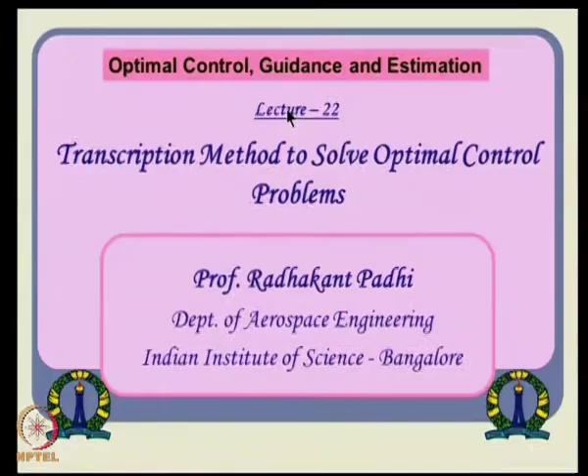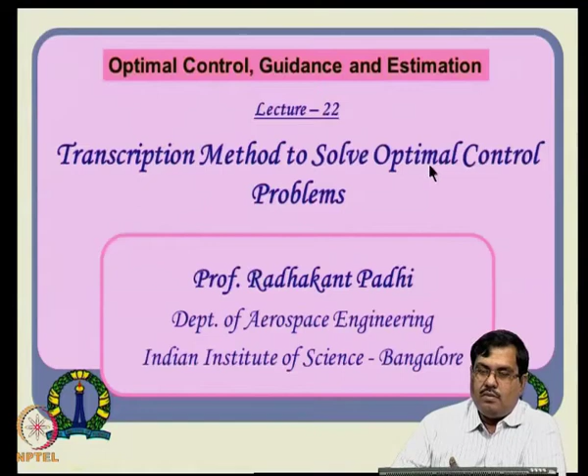Hello everybody, we will continue with lecture number 22, where we will talk about this different idea of solving optimal control problems, known as the transcription method, followed by its generic philosophy - we will not cover too much detail there. Then we will go to a recently evolving concept called pseudospectral transcription. It borrows the idea from transcription method but puts the problem in a different framework, so the solution can be very fast, and hence the claim is it can be done in real time. That is a very recent thing. So we will see the concept first - what is transcription method - then slowly migrate to that, and follow up with some problem solutions.

The topics are like this: first you will see some motivation, then philosophy of the transcription method, which is very different from what I am talking about here, which is direct transcription. This direct transcription is slightly different from what you have seen before, followed by pseudospectral transcription. We will demonstrate the idea of pseudospectral using a toy problem first, and then go to a real application problem to see how this is useful. Remember, several problems have been solved by different authors recently using pseudospectral methods - we will not go too much into that, but I will list references for further reading.

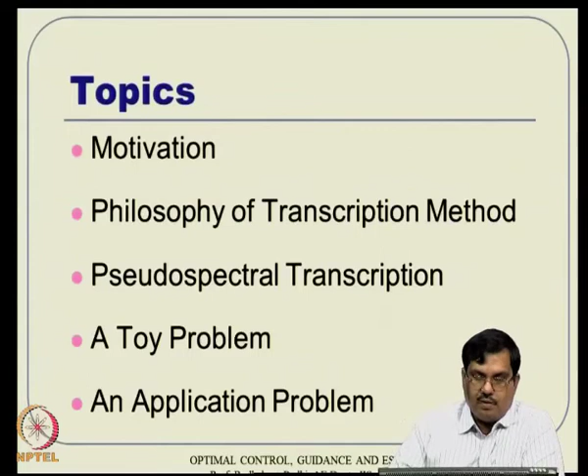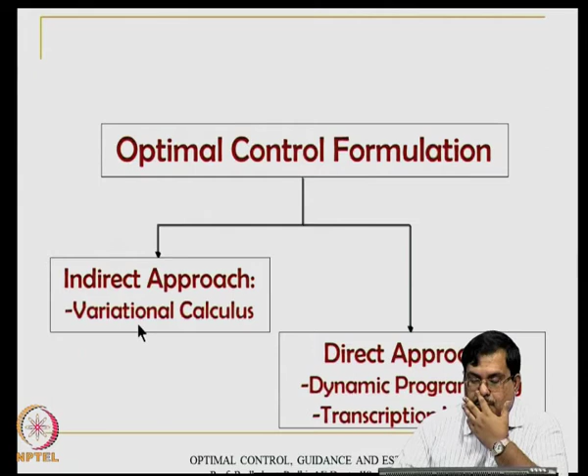Let us see the motivation first. In a generic, global view, optimal control formulation can be thought of as having two approaches: one is the indirect approach, one is the direct approach. In the indirect approach, we studied something like the variational calculus approach, which leads to a two-point boundary value problem. Whereas in the direct approach, we have dynamic programming, which we have already studied, and then we will have the transcription method, which we are going to study today.

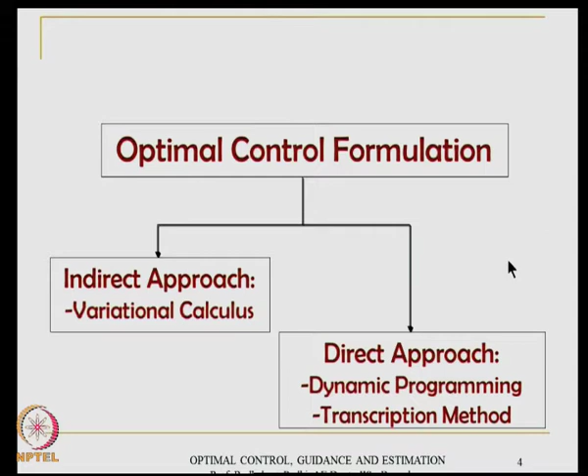So this necessary conditions of optimality through variational calculus - this is the idea that is developed. First, we have dualization of the problem: we have the state equation, but along with the state we now assume another co-state equation, another set of equations of the same dimension, like lambda dot. So we have the state equation, along with a co-state equation, and an optimal control equation, which is a stationary equation. If you solve it, we get the solution of control as a function of state and co-state.

Then there are associated boundary conditions: the initial condition is for the state, and the final boundary condition either is given for the state or comes through the transversality condition. Now, the question is - we have gone through these difficulties: the state equation develops forward, the co-state equation backward, it is a split boundary condition problem, hence it is a two-point boundary value problem, all sorts of things. Now, the shooting method is one more method.

Before, we talked about the gradient method and all that, but the shooting method is something like this: the whole idea is we have this initial condition of the co-state which is not known, so we guess the initial condition of the co-state. Now, once we have that initial guess, the state and co-state equations can be propagated forward together with respect to that guessed co-state value at T naught.

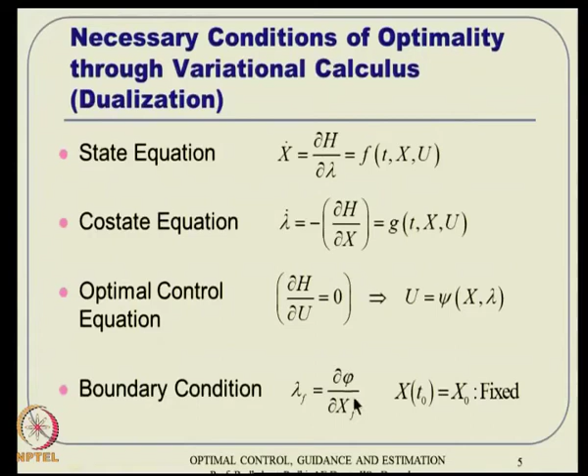Then we see - when t goes to Tf, your final value of lambda is somewhere here, whereas the boundary condition will give you something else, let's say that is here. So utilizing this error that has occurred, we update the initial condition from lambda naught 1 to lambda naught 2 and repeat the procedure. Maybe the next iteration it will go a little closer, and with further updates it will converge closer until it finally converges. That is the whole idea here.

So if you do that, the difficulty is that typically the co-state equation happens to be an unstable equation, and you are integrating it forward. So we have a sensitivity issue - it is sensitive to the procedure and essentially to the initial guess value of the co-state. The further difficulty is that we cannot have a good guess of the co-state, because co-states typically do not have physical meaning, even though there is a little bit of mathematical meaning.

That co-state is nothing but, if you already have the optimal cost, then in a dynamic programming sense, lambda is del J by del x, the gradient vector of the optimal cost. But that does not help too much in guessing a number for the initial condition of the co-state.

Typically it is done through a guessed control history, some heuristic or non-optimal stabilizing control. You use that control from the initial condition of the state to predict the state trajectory, and once you get a final state, you evaluate it and integrate the co-state equation backward, and hence get some information about lambda 0. Typically it is done that way.

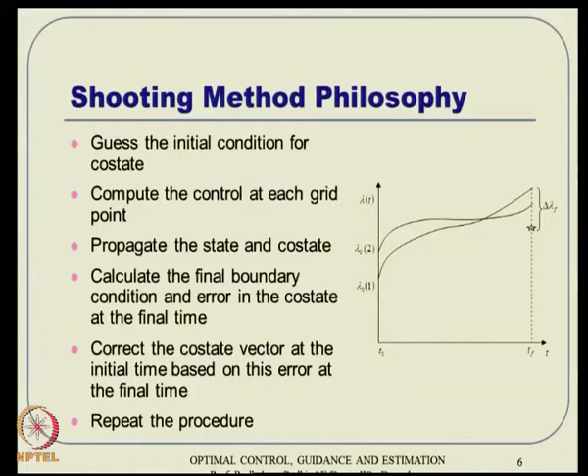The whole problem is that the co-state equation is normally unstable, and hence long duration prediction is not good. Anywhere there is an error, if you are not very close to the real optimal lambda 0, you will have this difficulty of error amplification very fast, because the dynamic equation is unstable.

So what do you do? We use this idea of divide and rule. Instead of predicting for a very long time, how about predicting for a shorter duration? Let's say T0 to Tf, I divide it into two parts, T0 to some intermediate Ti, and then Ti to Tf. This approach is called multiple shooting.

You split the duration into several segments like this, but when you do that, it brings additional constraints: around this joining point you have to make sure there's no discontinuity, the point should match, and derivative smoothness should also be there—at least the first order derivative should be equal on both sides. These are additional constraints at the joining points.

Having put these conditions in and solving it, this essentially leads to the concept of the transcription method, which is a direct approach. If you segment it into a large number of segments, it boils down to some sort of discretized version of the problem. Hence that is the approach called the direct transcription method.

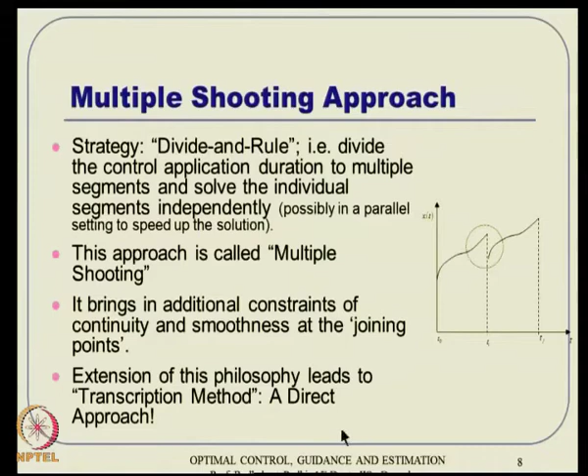So this is the philosophy of direct transcription. Essentially, it converts the dynamic system variables into a finite set of static variables or parameters, and then poses an equivalent static optimization problem. Then you solve that static optimization problem using static optimization methods—there are methods for so-called nonlinear optimization or nonlinear programming basically.

Then obviously you have to assess the accuracy and repeat the steps if necessary, with concepts like fine-tuning the grid points. If the coarse grid is not good, you go for finer grid points, and that is called mesh refining. So this is the whole idea of the transcription method.

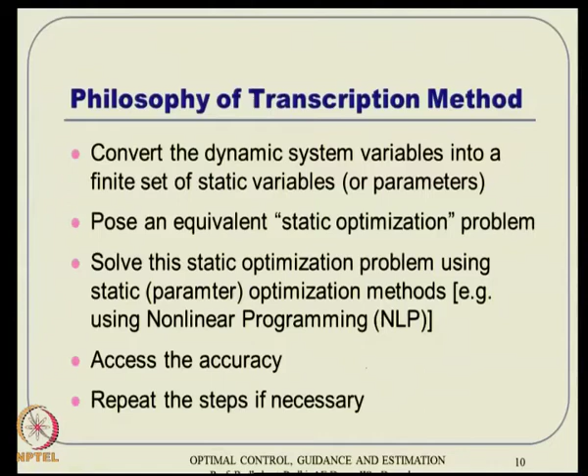Now, in a mathematical sense, what is the thing? We have the objective of minimizing a cost function—notations are slightly different here, but it conveys the same message. You minimize a cost function which is a function of state and control, an endpoint condition and a path condition, subject to the dynamic equation. For endpoints, there are soft conditions and hard conditions—some endpoint conditions equal to zero, functions of endpoints telling that the desired value can be fixed, or the initial condition can be known. All of this falls within this functional form if you write it that way.

There is also a path constraint which hasn't been discussed so far, but we'll discuss it in a subsequent lecture, where the problem can be subject to state and control inequality constraints along the way.

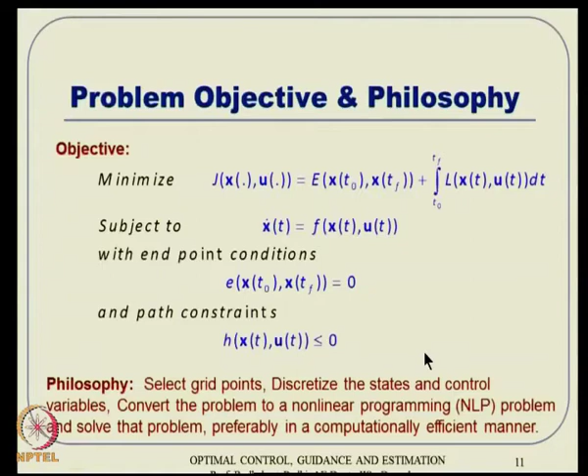So, these constraints are also part of the problem formulation, don't forget that. So, this is how the problem objective is, and the whole idea is we select a set of grid points, discretize the state and control variables, convert the problem into a nonlinear programming problem and solve that. It should be solved in a computationally efficient manner. That is the whole idea of direct transcription.

To demonstrate the idea, let us say the time domain is discretized into several points, one here, one here, one here, like that. And if you have a continuous function, like x of t, what we are saying is we select the value of x of t at that point, and then here, and like that, then join it linearly. So this continuous function is approximated by a set of straight lines, or a piecewise linear function, you can see it that way.

So essentially we approximate the trajectory that way and discretize the state equation. You can also discretize the control variables, similar to the state variable. Then we also need an approximation of the integration of the cost function, and we will proceed with that. It is easy, but there are several improvements on that as well.

Alright, how do you mechanize this? This discretization of the state, you can very easily do using Euler's method. In other words, if you take Tk plus 1 as Tk plus delta t, or Tk plus h, then you get something like that. Very easily you can have a pair of x naught u naught, x1 u1, and so on for the entire domain.

Euler's method is very easy because it tells x of k plus 1 is xk plus delta t or h, whatever it is, times x dot. If you have a differential equation x dot is f of x, let us say f of x, u, then xk plus 1 is xk plus delta t times fk of xk, uk. So that is very easy to see.

You can implement that and have a set of finite constraints. This will act as a constraint now on those variables. So the system dynamics is accounted for on the grid points, in some sense.

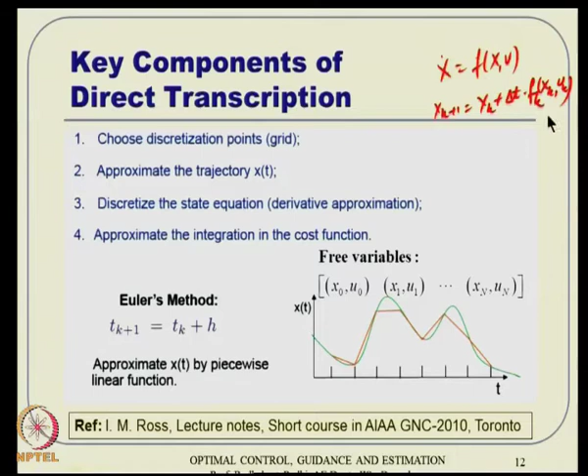The endpoint conditions also you can put: x of t naught, if you put a grid point at the initial time and final time, then the values are directly known to us. Then path constraints are also given, these are the path constraints that need to be satisfied. Remember, all these things are now converted into a set of discrete variables. So everything happens in a discretized sense.

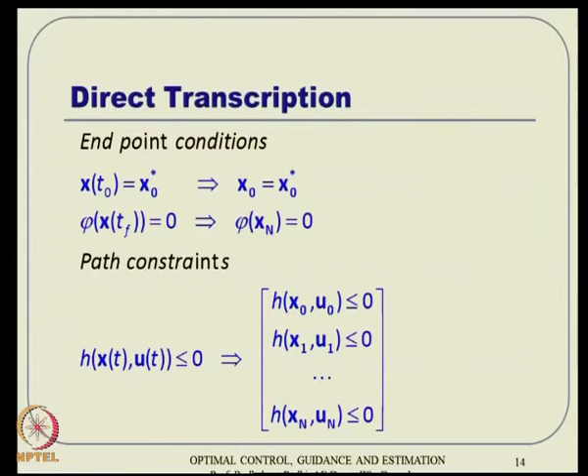So now we have a compatible nonlinear programming problem, and hence we can exploit any of these numerical techniques available to solve this problem. Somebody can think of utilizing this MATLAB optimization toolbox. There are various other toolboxes available in the market as well, but MATLAB has this fmincon function which I have discussed before. Those can be used to get a solution for these discrete variables. Remember, you are not solving a continuous optimization problem, you are solving the discretized optimization problem here.

Then there are various ideas about how to do better approximation of the state dynamics. Euler integration is not good. You can think of higher order finite difference, you can use the RK4 methods, RK2, RK4, things like that. We can use polynomial approximation in segments, the Hermite polynomial and things like that.

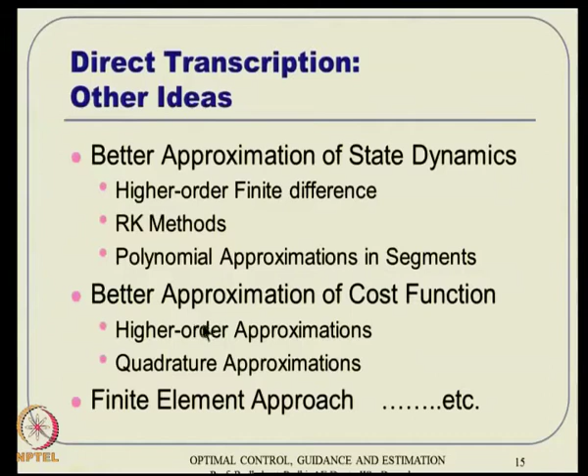Coming to better approximation of the cost function, you can use higher order approximations, or you can think about using quadrature approximations as well. These are mathematically more powerful. You can also talk about finite element approaches nowadays and many different variations around that.

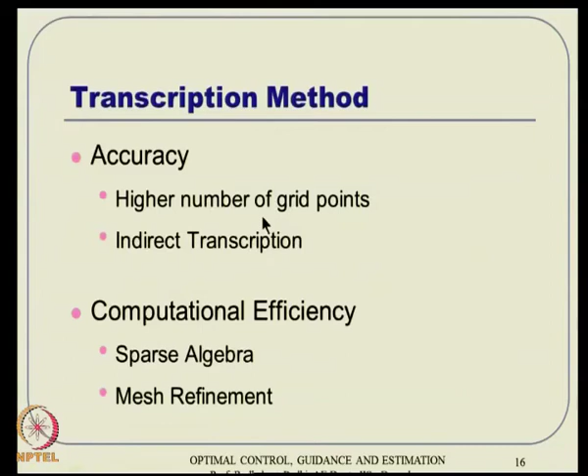So in general, one can think about improving the accuracy using a higher number of grid points. Then there is this indirect transcription method, which is always there with us, which goes through the dualization of the problem via the lambda dot equation, and then using some sort of numerical procedure for that. That's really indirect, so we are talking about the direct transcription method here, which is not that much relevant. But ultimately, remember, even if you go for indirect transcription, the solution you get is for the grid points only, so that is our restriction.

Then coming to the computational efficiency point of view, people can think of using sparse algebra, because if you see this matrix, a lot of zeros are there. Since a lot of zeros appear naturally, why do zero computations? Zero into zero is zero all the time. So this sparse algebra can be exploited to speed up the algorithm.

And then also you can use this mesh refinement idea. So first you solve this with a coarse grid, minimum number of grid points, you solve it, and then increase the number of grid points, and then subsequently increase it further, and so on. That is the idea of mesh refinement.

So initially you will not waste too much computational time by working directly with a fine grid point. A lot of grid points means a large dimensional optimization problem, and you do not want to run into the difficulty of a large number of local minima and issues like computational time. So it is always advisable to start with a coarse grid and then go slowly towards more and more grids. That is called mesh refinement.

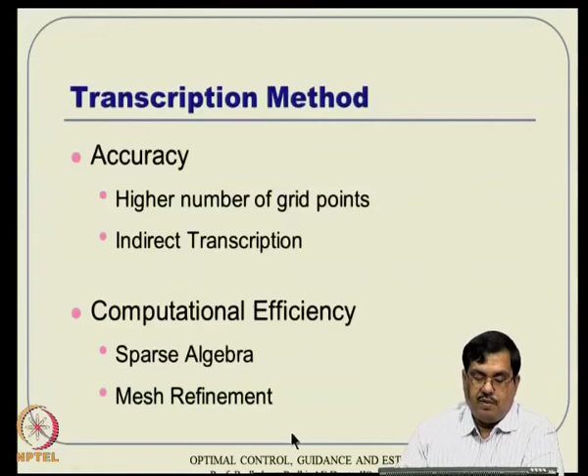Many references are available based on this whole idea of direct transcription. The first thing that probably comes to my mind is this seminal paper that came in '87, and then a little more explanation with different problems appeared in '92, which made it more headway. And then there are several other papers available, survey papers, with more elaborate explanations. You can see some of these, especially the last one is also a very good one. In fact, the author has written a book, and he has also developed a commercial software for solving industry-grade optimal control problems using this direct transcription approach.

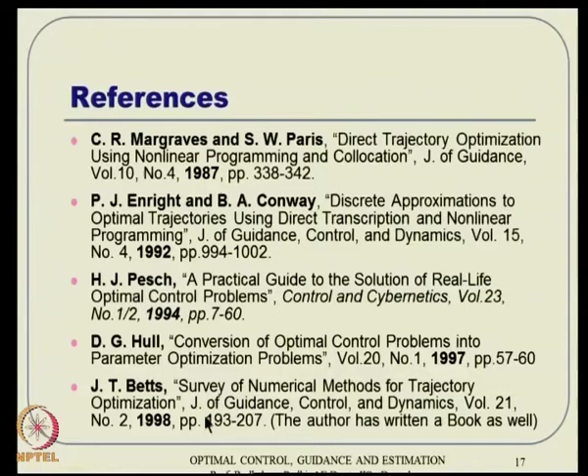So you can see some of these concepts out there. Especially you can concentrate on these page numbers, about 15-20 pages, where you can get a lot more insight into that.

Anyway, let us come back to that. As I told in the beginning, we will concentrate on a different approach which has evolved recently over the last 10 years, I will say, which has become very popular in the aerospace industry, especially in USA, because of several practical problems they have applied it to. It has also been tried out in the International Space Station zero propellant maneuver, and several satellite minimum time maneuvers. Now it has also been applied for reusable launch vehicle guidance applications, and it has also been used in robotics, collision avoidance, things like that.

So there are many things happening recently. I thought it is a good idea to see this philosophy, so that if some of you are interested, you can develop some affinity towards this, and probably think of it as a possible research direction for yourself.

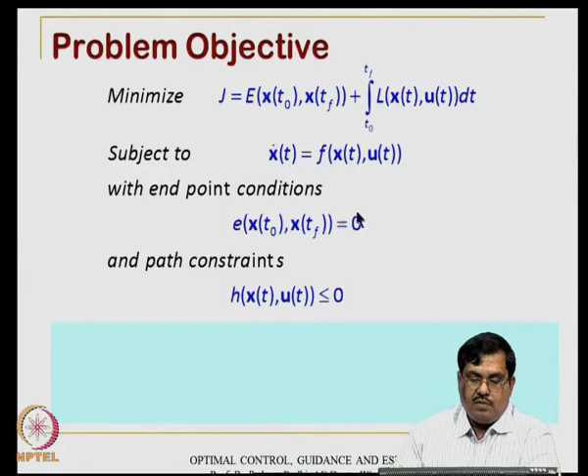Alright, so we will go back to the problem definition, and then come back with this objective. We have to minimize this cost function with the soft endpoint consideration. This cost function contains an endpoint function and a path dependent function. Subject to the system dynamics with endpoint boundary conditions as well as path constraints like this.

The philosophy here is to discretize the states same as before, as well as the control, using the pseudospectral method. So we do not have to blindly put grid points and discretize it directly. What is pseudospectral, I will explain in the next couple of slides. We have to discretize it, but in a different way using the pseudospectral method, so that you can convert the problem to a very lower dimensional nonlinear programming problem.

So the whole idea here is how to formulate a lower dimensional NLP problem, so that it can be solved much faster. And while solving, you have to solve it in a very computationally efficient manner. So various branches of mathematics will come together here, and essentially it will be put together in such a way that ultimately it results in a fast solution.

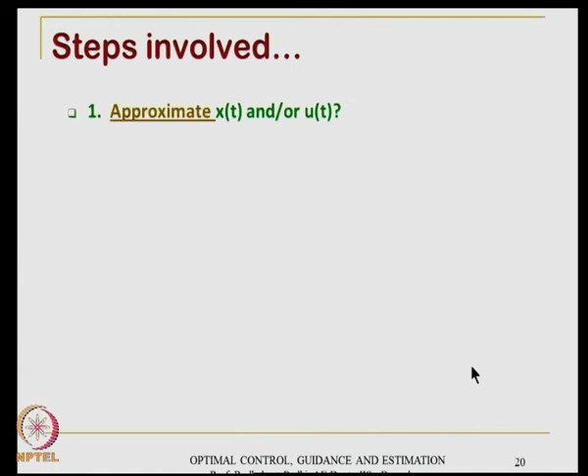Okay, so let us see the steps involved for this particular thing. First of all, you have to approximate x of t and u of t, but how do you do it? Something like this. You do that.

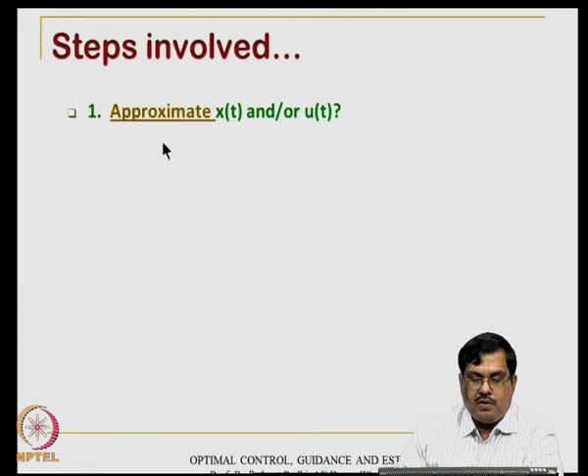Remember, this pseudospectral method is largely inspired from solutions for partial differential equations also. So one way of solving partial differential equations is through basis functions and all that. You use basis functions in one dimension and leave the other dimension for converting PDEs to ODEs. Probably that concept we will see towards the end of this course in one or two lectures.

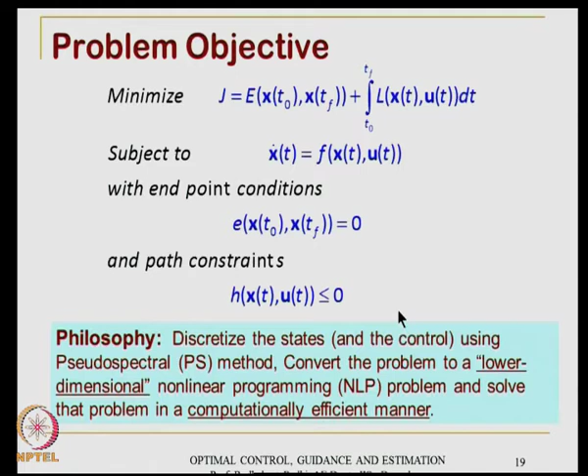But right now, borrowing the similar philosophy, what we do here is first we approximate this state and control using some sort of basis functions, phi n, which is phi 0, phi 1, phi 2, and things like that. These can typically be polynomial basis functions, for example power series and all that. That is not very effective.

So the study tells us that in function approximation theory, if you go to that side of the story, there are better function approximation basis functions like Chebyshev polynomial, Legendre polynomial, things like that. They are essentially kind of power series, but with terms taken together, and things like that. More on that you can study in some math book - Legendre polynomial, Chebyshev polynomial, things like that.

This dimension can be different. For simplicity of algebra's sake, we will take it as the same, but here it can be n1, here it can be n2, it does not hurt.

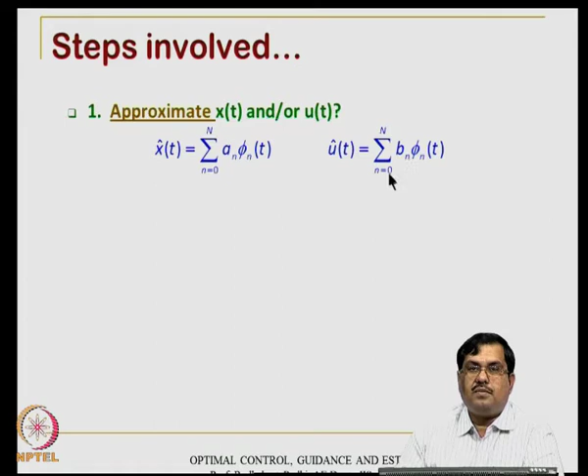Then you have to select a set of grid points anyway, and I will summarize how to select a set of grid points. Now how are these points selected, and that becomes some sort of a question.

And then obviously it turns out that uniform grid points are not a very good choice. So we would have to opt for these so-called non-uniform grid points, because the whole idea is how to represent the same problem in a smaller number of grid points. So a large number of grid points is not a good choice. We want to have as few as possible, and it turns out that we can really do a good job with a smaller number of grid points, but we have to compromise on this idea of uniform grid points. We have to go through non-uniform grid points, Gauss collocation points, and things like that.

Okay, so now we discretize the differential equation using the pseudospectral method, and that method turns out to be something like this. We have this finite difference versus pseudospectral thing. That means finite difference is typically not good. So what you do is for this differential equation, we do this spectral discretization sort of thing.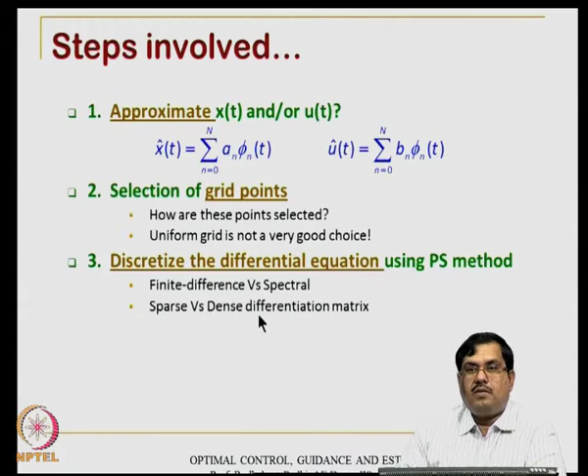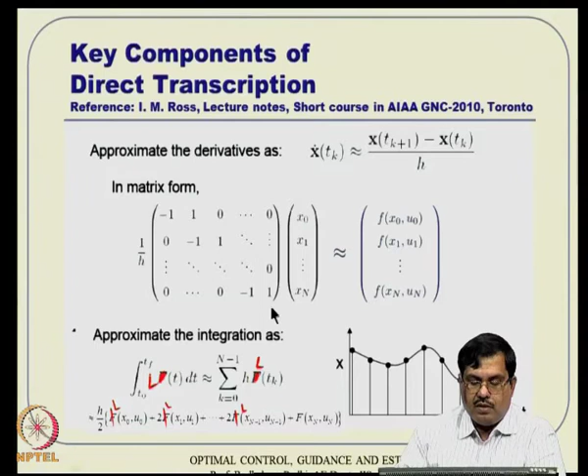Essentially, instead of running into a large dimensional sparse matrix, what you are looking for is a small dimensional dense differentiation matrix. What is a differentiation matrix? It is something we studied just now, this form. This is called a differentiation matrix, if you see that actually. So this can be defined as a differentiation matrix.

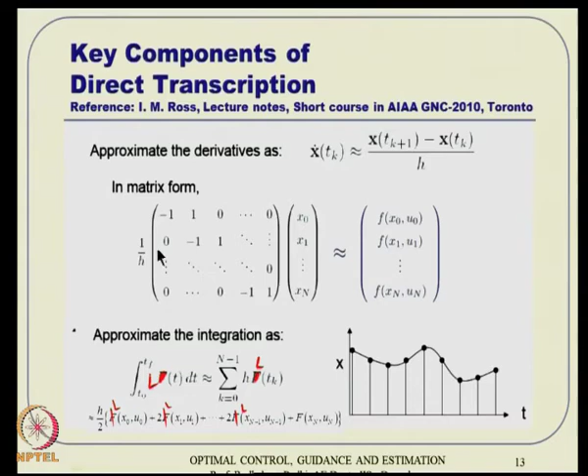So instead of a large differentiation matrix with lots of zeros, a sparse matrix, what you are looking for is some sort of similar matrix which will do a similar job, but we want a smaller dimension yet a dense matrix. We do not want to see zeros everywhere actually.

Alright, so now we have to approximate the integral equation also, and that can be done using these quadrature rules for better accuracy and all that.

Now we have to apply this efficient optimization. After that also we are not done, remember that. Even though you have represented it as an equivalent smaller dimensional problem, still that smaller dimensional problem has to be solved as fast as possible. So you have to use algorithms which have to be very powerful.

Also remember that whenever there is an increase in capability in the processor, that also comes very handy actually. So in other words, the computational advantage of modern day computers or modern day processors, things like that, that also comes very handy.

But it's not the entire solution. The solution lies really in good algorithms. So you have to opt for some better capable algorithms to solve this NLP problem, and always solving that on an onboard processor which is more capable is always better actually.

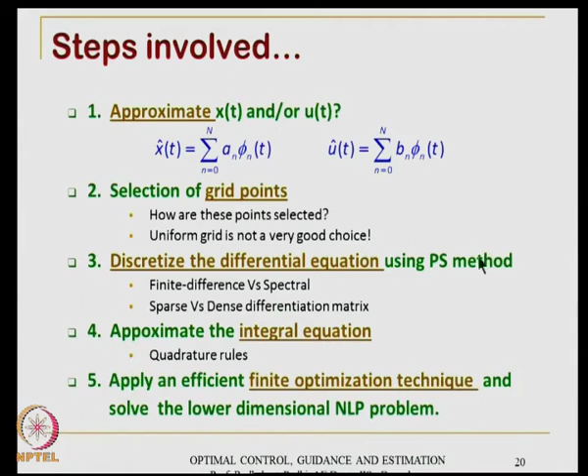Okay, so this is how the whole idea is there, and I will explain the steps a little more clearly here. So how do you do step 1? Step 1 is approximation, right. So how do you do approximation?

So this inner product is defined something like this. You have two continuous functions. So if you have two continuous functions f1 and f2, then the inner product between them over some finite interval, let's say 0 to t, is f1 of t and f2 of t dt sort of thing. So that is what the inner product definition is, that is what you are using here.

Alright, now the question is, you have a test function series, but what test function will you need to select so that the algebra becomes simple and it results in simpler dynamics and all that? So one idea comes to mind: whenever you see an integral and all that, why not try out the delta functions?

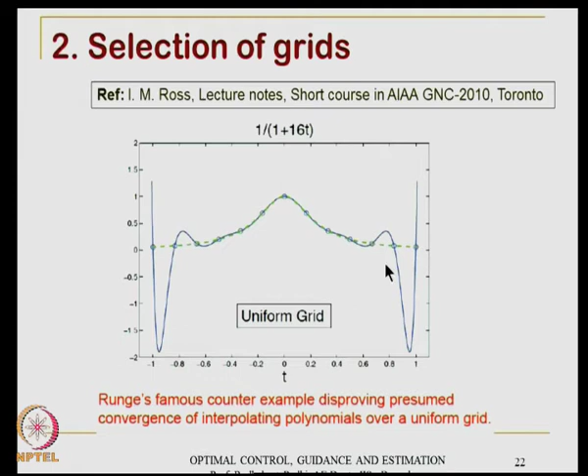That means the grid point value is same as the function value, but in between the grid points there is a large departure. So obviously this is not a good function approximation. But if you take the same function and use non-uniform grid points, you will have a lot better advantage.

So these grid points which are non-uniformly located are typically called grid of collocation points, or in a loose sense, grid points. These are typically done in a very non-uniform sense—something close here, something close here, something maybe sparse here, depending on several approaches.

So anyway, this is what you see here, and the literature claims there are several ways of selecting that—something like uniform, then Gauss grid points, Gauss-Radau grid points, Gauss-Lobatto grid points, various things available in the math literature. It turns out uniform grid points are not good, because whether you have free endpoints, 1 endpoint fixed, or arbitrary endpoints, nowhere is it approximating in a good way.

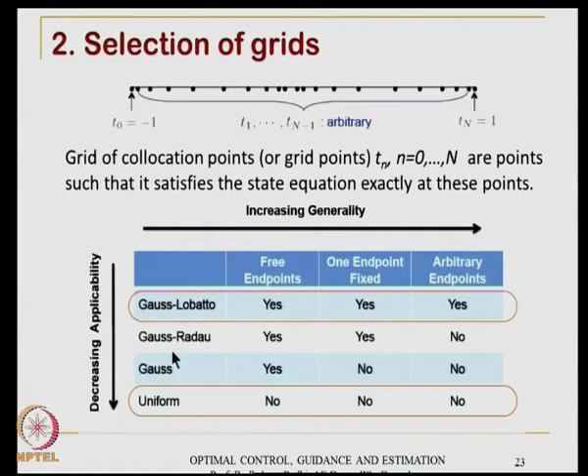But if you slowly move towards Gauss-Radau and Gauss-Lobatto, it turns out that Gauss-Lobatto points do a much better job everywhere. So now the recommendation is always to go towards Gauss-Lobatto points. The exact formulas are always available in the literature, you can see it very clearly. Gauss is slightly better, but don't stop at the Gauss level—go towards the Gauss-Lobatto points.

Alright, so now coming back to approximation of the differential equation, here is something we need to really understand. Let us assume we have selected the basis functions, we have approximated that way, and we have selected the grid points also. Now what actually? So what we are looking for is approximation of the differential equation.

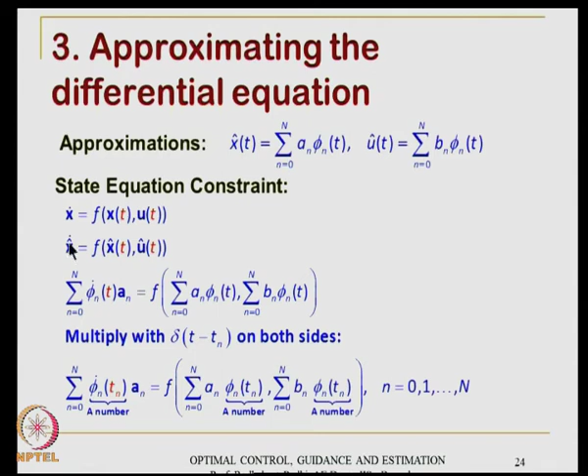So we have this state equation and control equation, and the equation constraints will tell us what is happening here. I will put the approximate value here, whatever I am approximating—the dot, remember this is only a function of time, this is a constant. So this dot will reflect in that dot. And then we have this quantity on the right hand side. Now if you multiply with delta functions on both sides, this fellow happens to be some sort of a number, and you will end up with these coefficients only.

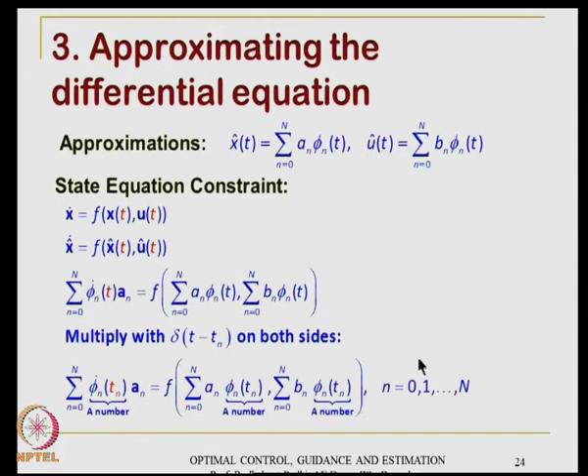Now let us see that in a little bit more elaborate sense. Let us take something like a Chebyshev polynomial and confine ourselves to just 5 grid points, to have clarity of our idea. So we have this grid. The nice thing about it is the first 2 things you have to write, and the subsequent things you can write recursively—ultimately it happens like this. Now what happens is x hat of t—let's say we expand it this way.

u hat is also expanded that way, so we are not telling that explicitly here. But then x dot of t, when you do that, it is like T0 dot, T1 dot, T2 dot, because a0, a1, a2, these are all constant quantities.

The good thing is these quantities, once evaluated at a grid point, happen to be numbers basically. So if I look at this equation at a particular grid point, say grid point 0, it becomes something like this, because these are now numbers. Similarly, x hat of t1 happens to be numbers, and these are the coefficients which are typically unknown.

So what will happen? On the left hand side you will have a differentiation matrix in the form of these, but these are all numbers now, t1, t2, t3 are all grid points. And the right hand side is also a number, because ultimately these grid point values are available.

So once the grid point values are available, those become some sort of known numbers. What are unknown are the coefficients a0 to a4 and b0 to b4. So this essentially, even though it is a differential equation constraint, results into some sort of algebraic constraint in the form of parameters.

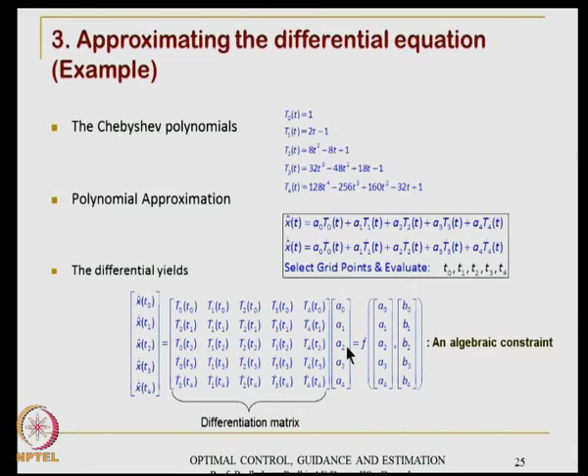So finally what we have is a discretized version of the same problem, which talks about minimizing this cost function subject to this set of algebraic equations now with endpoint conditions and path constraints.

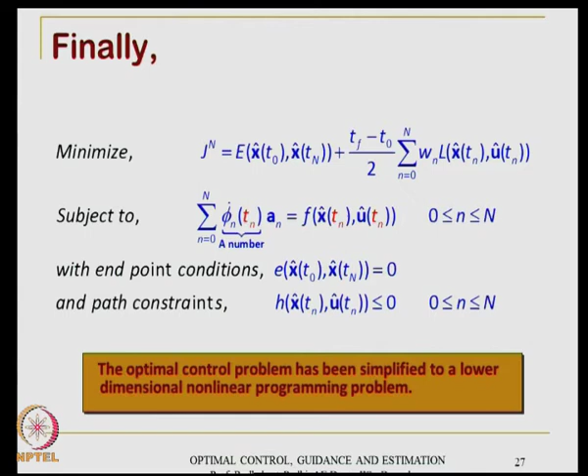So this optimal control problem has now been simplified to a lower dimensional nonlinear programming problem, and hence you can talk about nonlinear programming problem solution techniques and all that, which you can use to solve this problem.

Alright, so now to demonstrate this in a small toy problem first, and then we will solve it as a good application problem and wind up this lecture.

First this toy problem: we want to minimize control u squared from 0 to 1 subject to this linear dynamics x dot equals x plus u, with the boundary conditions like this, and the control constraint given, the modulus cannot exceed 1.

Now this trivial toy problem interests me in a different sense. If you really look at this, it's a quadratic cost function with linear state equation and all that. You can actually go to the scalar problem also. So we can go back to the closed form equations we already know.

Assuming this constraint is not there, you can go back to the Euler-Lagrange equation or whatever equation we already know, and try to solve this problem.

Interestingly, it turns out the solution is nothing but u equal to 0 throughout. So if u equals 0 throughout, that means no control, the homogeneous solution happens to be the optimal solution, and since u is 0, the cost function is 0 also. That is the best thing you can have - without applying any control you will be able to do the job.

Remember, this is an unstable problem. x dot equals x plus u, this is actually an unstable problem. The trajectory will evolve in an unstable sense. This is time, this is x.

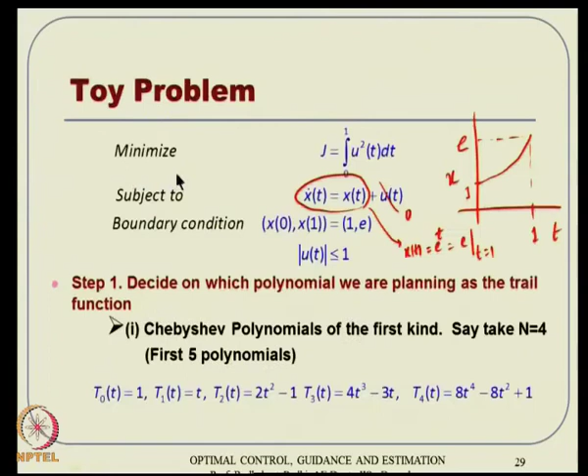Anyway, you can use this and go ahead and see this shift is okay. One is Chebyshev polynomial first kind, other one is shifted Chebyshev polynomial for the interval. So details you can see in a typical math book.

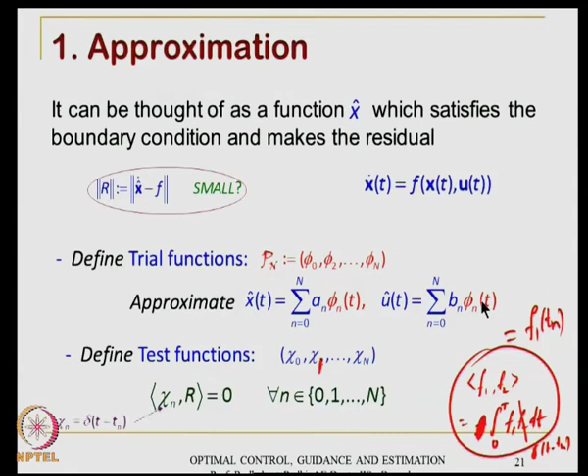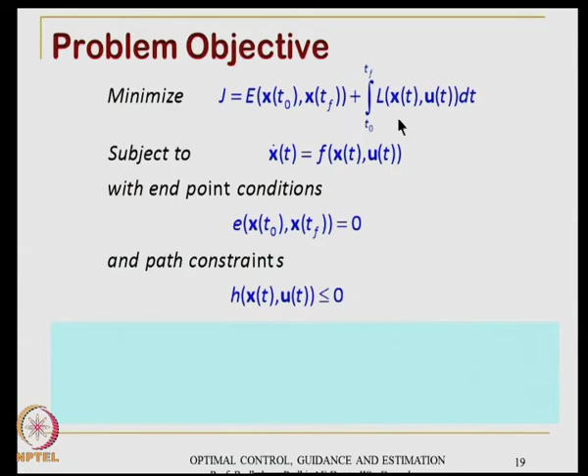And the collocation grid points have been defined something like that. Remember, all these things, I forgot to tell one point probably, let me summarize again. Here we talk about 0 to T0 to TF, but the entire quadrature rule, grid point selection, all that will talk about something like -1 to +1.

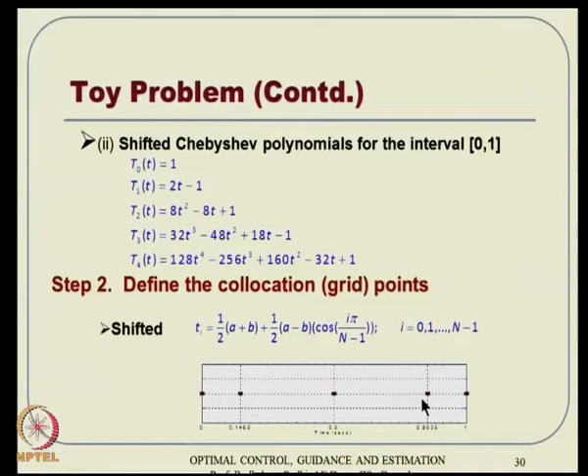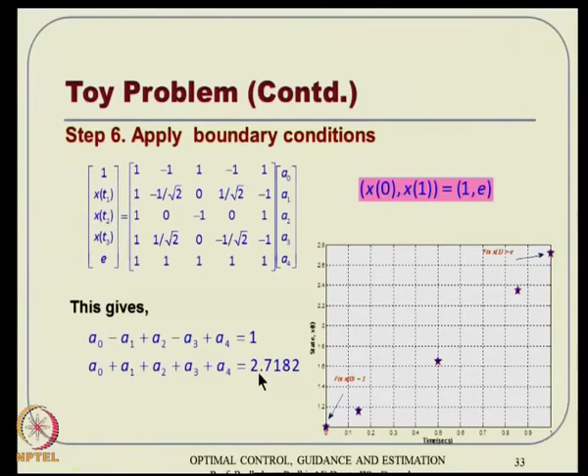Now this discretization of the cost function. So we discretize that way where W's are selected as something like this. All these numbers are given here, and then it results in a discretized cost function.

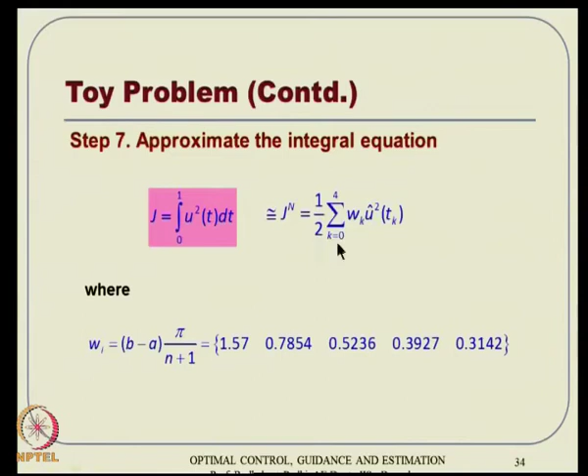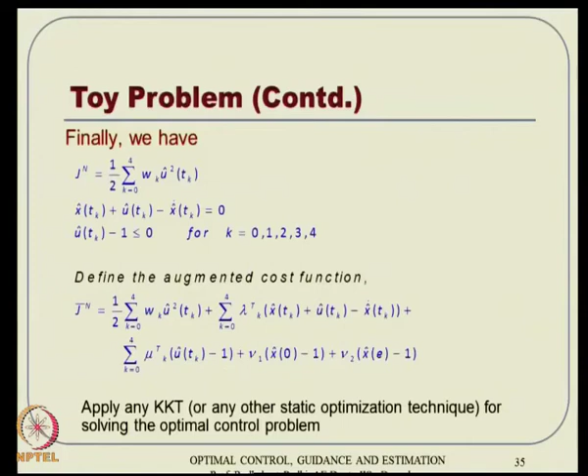So finally, we have this cost function to optimize subject to these conditions, and define the augmented cost function and things like that, and then we can apply this KKT condition, Karush-Kuhn-Tucker condition, or any other static or numerical optimization technique to solve this optimal control problem. Now the solution turns out to be very close to what we expect.

It starts with 1 and then e here like that, but once you put back the solution form, remember the solution is a polynomial actually, ultimately the solution is a polynomial. What you are solving for is the coefficients an and bn. What we already know is the basis functions Tn. So once you know the coefficients, we know the solution all over.

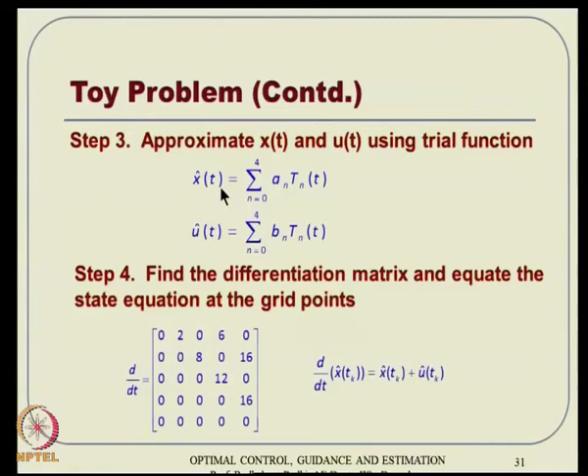Now one idea is, okay, we know the solution for control, we know the initial condition for the state, so you can integrate it using RK4 and then you get a different sequence of numbers, and those numbers have to fall on this polynomial that you know. So that's a validation technique. Let's assume that exercise is done in a good way.

Anyway, so coming back to that, this is what it is. The numbers that you are getting are for the grid points, but associated with that, we also have a polynomial solution for this, and it happens to be very closely there with respect to the exact solution. One is interpolated solution, one is collocation point, and one is exact solution. So all the things are together, and that gives us a lot of good confidence.

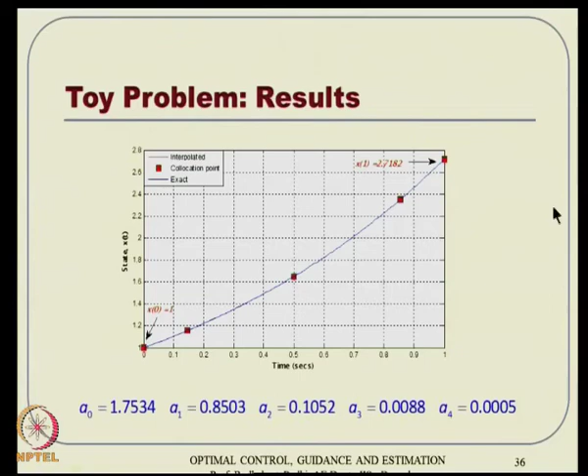Alright, so that is some sort of confidence for going further. And then what we do is we went to a little bit more realistic problem, something called front to back turning of an air launched missile using pseudospectral method. So let's see how you do that and what's the problem for the rest of the time that I have. This reference we have recently presented in the IFAC workshop which was done in Bangalore, right here in IISc.

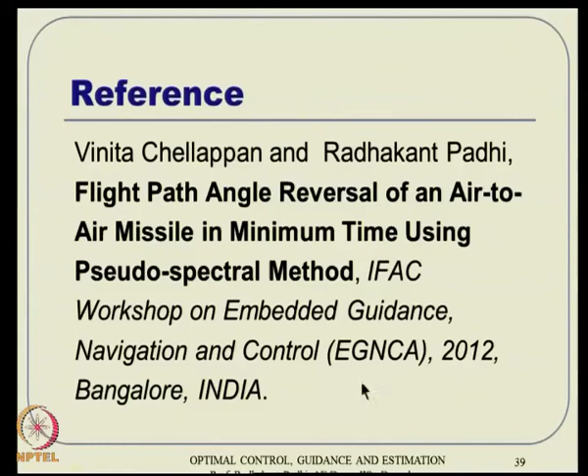Anyway, this is the problem where you have a carrier aircraft taking a missile. Now typically what happens is this aircraft and whatever missiles they carry, they are all front looking. That means any target that appears in the front side, they can be launched and they can be engaged. But what happens, some target appears in the back, then the whole idea of dogfight comes into picture.

That means this aircraft can increase its angle of attack, so it increases its lift, and then it also has more drag, so the speed comes down. It goes up with a lesser speed. By that time the target goes front and then it does the reverse maneuver, angle of attack reduces, it comes down again, and so roughly it becomes behind the target. This maneuver, first going up and then coming down, is nothing but a cobra maneuver. These are typical terms used in the air combat scenario.

Alright, so but that takes a lot of time. First you have to go up and then increase your angle of attack, go up, reduce, come back, and then align yourself so that you look at the target in front of you. So by that time target is not passive, it is also looking at you. Remember, for the target, if it also happens to be an aircraft in a dogfight scenario, you are already in front of him. That means this target has an advantage of firing towards the aircraft rather than us getting an advantage to fire towards the target.

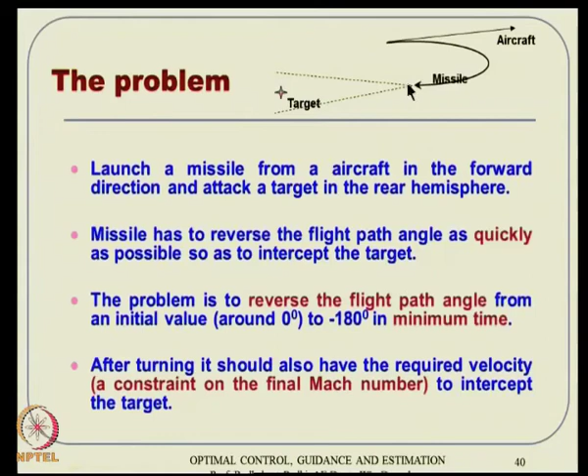So ultimately what the constraint is, when gamma goes to minus 180 degrees, it should also have some desired final Mach number basically, so that you can still continue to move towards that.

The problem is to reverse the flight path angle from 0 to minus 180, maintaining the final Mach number of 0.8, and it has to be done in minimum time.

The thrust is not happening in the body direction, it has to happen in some sort of a different angle direction, which can be done typically through various mechanisms of thrust deflection: can be some SITVC, side injection thrust vector control, or maybe some fin deflection at the end, or there can be jet vanes or whatever.

Some mechanism exists so that the thrust can be deflected, and that actually augments the angle of attack turning. Thrust vector is a much more powerful vector, so if it turns, then the vehicle turns very quickly also, in a way.

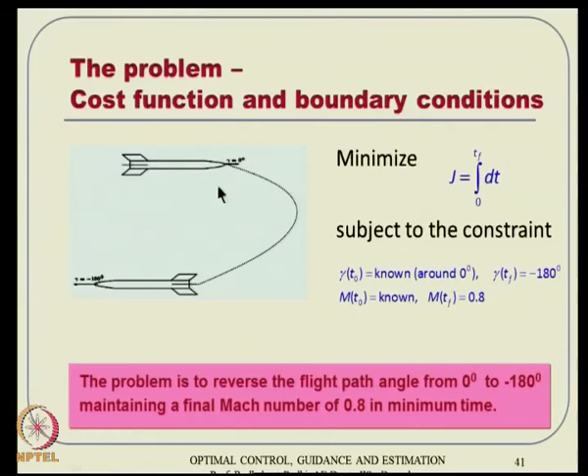What you are assuming here is the turning happens in one direction only, that means the flight path angle is monotonic. So if you assume that, then you can take the flight path angle as the independent variable, and this leads to a fixed final condition where the initial condition of gamma is known and the final condition is minus 180 degrees.

So it happens to be a fixed final condition now, for a fixed final time sort of thing. So that becomes amenable for solutions using finite time optimal control theory.

So the entire assumption boils down to this: flight path angle is a monotonic and continuous function with respect to time. That is the inherent assumption based on which we can attempt to solve this problem.

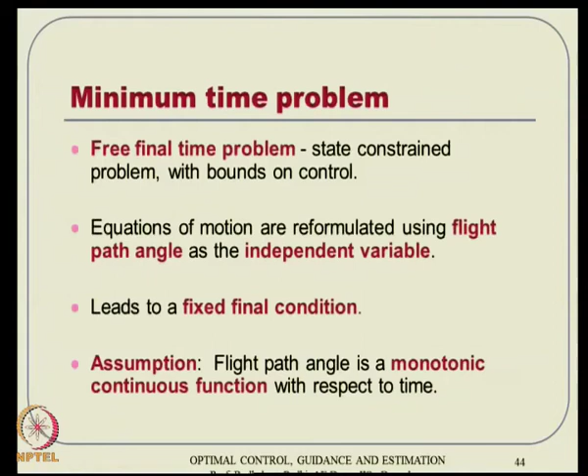When gamma is an independent quantity, we define dm/dgamma as something like m prime by gamma prime, dt by dgamma, 1 over gamma prime. The modified cost function from 0 to Tf is equivalently written in terms of integration of dgamma. Since dt has to be converted to dgamma, we use dt by dgamma, which is 1 over dgamma by dt, and dgamma by dt is available from the state equations, so we put it back here. So j is available as some sort of complex function, but ultimately it is a time-minimizing cost function.

There is a hard constraint: m of gamma f has to be 0.8. Then you go through a long algebra of discretized mathematics to minimize this cost function using a quadrature rule, subject to the derivative approximation, the equality constraint equation, and the path constraint that alpha cannot be more than 20 degrees and delta cannot be more than 72 degrees. Delta can be much more than alpha. The endpoint conditions are such that m0 can be anywhere between 0.3 to 0.8, however mf has to be 0.8, that is the problem.

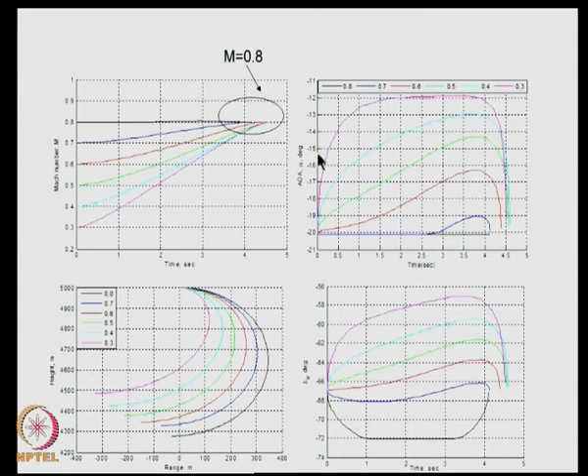The point here is the final Mach number is 0.8 no matter where you start, so velocity drop is not there.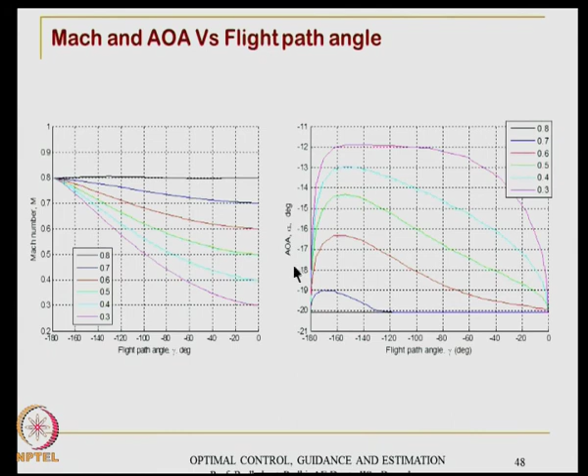Then Mach number versus angle of attack, Mach number versus flight path, and angle of attack versus flight path can all be plotted in different variable senses and have a lot more meaning. Remember, these plots have to be seen from right to left — no matter what you start with, you all end at 0.8. Flight path angle evolves from 0 to minus 180 degrees, so these plots have to be seen in reverse, right to left. Similarly for angle of attack evolution over the trajectory, and flight path angle per time, it always goes from 0 to minus 180, but depending on different cases, different things are there.

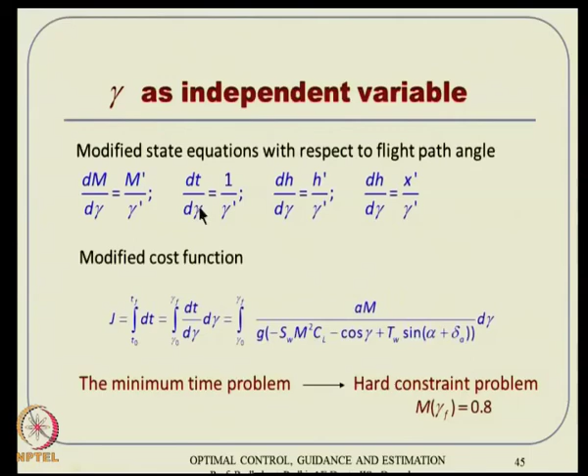How do you generate this plot? Once flight path angle becomes the independent quantity, time becomes a state equation, so the dt by dgamma equation is also put into the problem formulation. Corresponding to a particular gamma, you get the corresponding value of time. Both cannot be independent quantities, only one can be independent, and the other varies according to that. That is how the time is generated and plotted like this.

Now we can think of the effect of reducing angle of attack and things like that. This depends on the shear angle again — if this is more, that can be less, and so on.

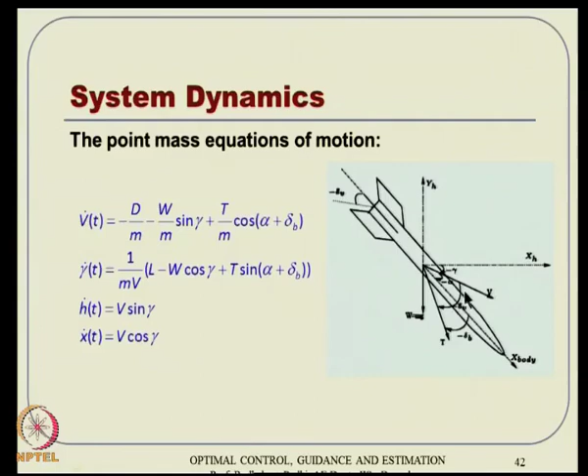Now, what is shear angle and body angle? Some of these are aerodynamic concepts. With respect to the body, this is the body angle delta B, and with respect to the velocity vector, this is a different angle, the shear angle — between the velocity vector and thrust vector. That can even be higher than the body angle, according to the diagram.

Alright, so this is what it is actually - the effect of reducing the angle of attack along with the flight path. All details are there in the paper, you can read some of the explanations there. So let me not elaborate too much here, it is all happening in a good sense.

You can plot flight path versus time, how it evolves, and plot Mach number versus time, how it goes from 0.5 to 0.8, depending on different cases actually.

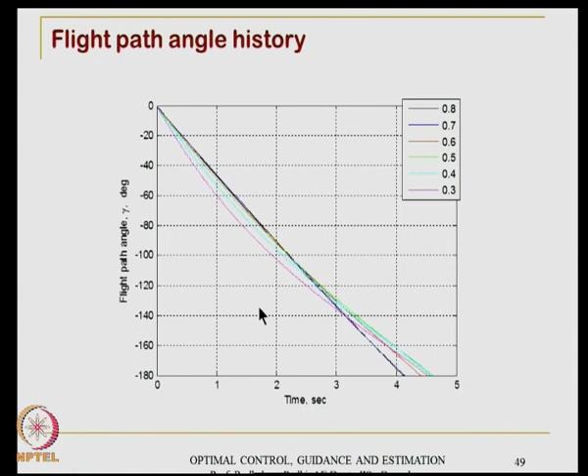That means we put various bounds on alpha. We have this initial bound at some 20 degrees. Now we put various bounds on that, and depending on that, the other things get streamlined out actually.

Now the question is how it's a function of grid points. Initially you start with a coarse grid, 5 grid points only - not good, some of these things look bad. But once you have this history in place, you can use it as a guess history and go for finer grid: 5 to 10, 10 to 12, 12 to 20, 20 to 30 like that. You can observe that beyond 20 there is not much of an issue, so going beyond 20 is no point. So we take 20 grid points as good enough for the solution, and we leave it with the 20 grid point solution.

You can see the number of grid points versus computational time. If you have 5, obviously your computational time is very small. These are all evaluated on this hardware setting, a regular desktop with MATLAB 7.4 running, not a dedicated processor. The whole idea is if you have a real-time onboard processor, a dedicated processor, and your program written in a lower-level language, then it can be much faster than this.

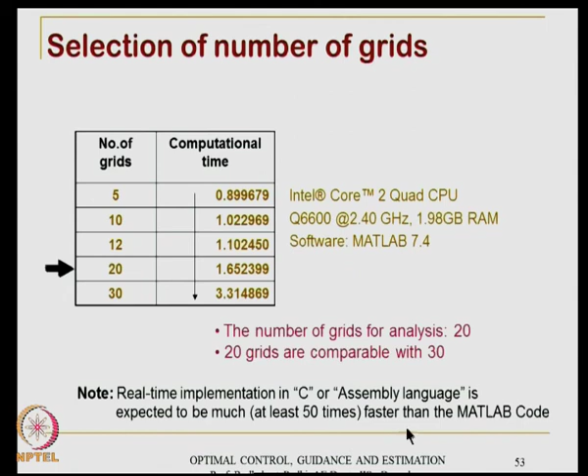So even with this setting, with 5 grid points the computational time is low, then at 10, 12, 20 it starts increasing, but beyond a point, beyond 20, we don't recommend it, so we freeze it there. The real time implementation in C or assembly language is expected to be much faster, and hence we think it can be implemented in real time actually.

Now, what was the idea of Chebyshev versus Legendre? It turns out that whether you take Chebyshev polynomial or Legendre polynomial, both happen to give the same result. So one way or other, there's no advantage per se. That exercise tells us that - this is another consistency check you can think about.

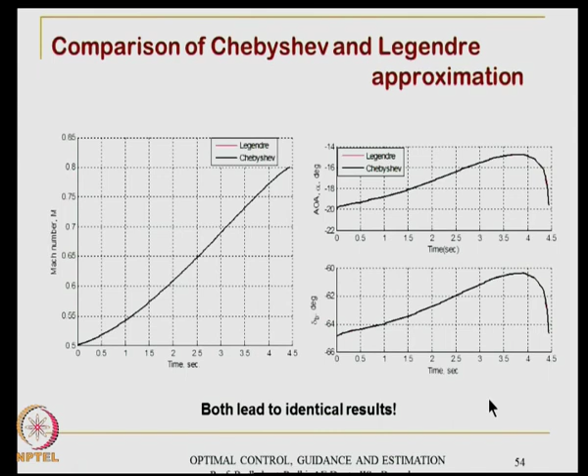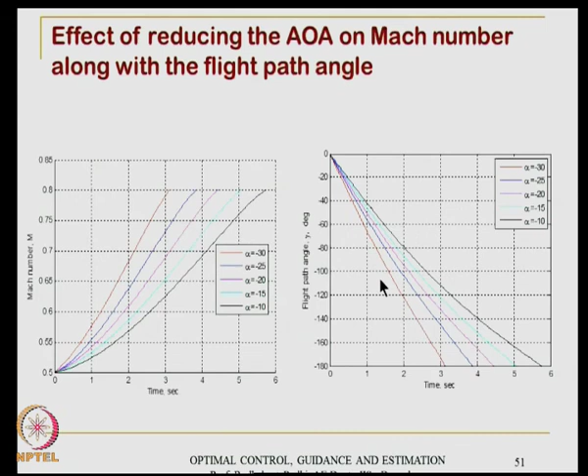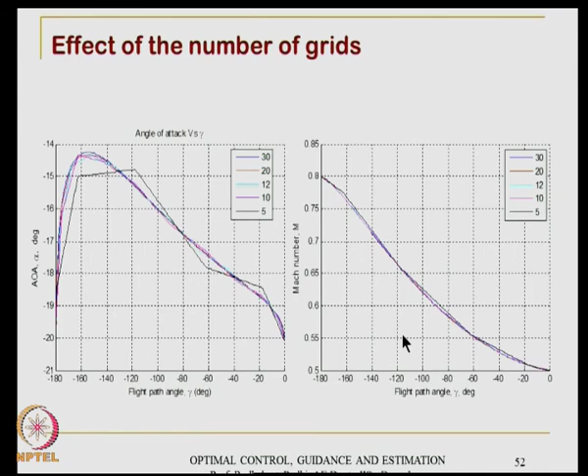So conclusions for the missile turning problem are like this: the rear hemisphere engagement is feasible. Physically speaking, there is no need of dogfight, provided of course you can implement these high shear angle values and all that. These values you're seeing here, body delta B or shear angle - thrust control augmentation has to be implemented. That has to be seen. Subject to that condition, it is possible to arrive at this conclusion.

Minimum time flight path angle reversal is feasible with realistic control force, that's what we think. And then, promising numerical results mean they are computationally efficient and a viable tool for optimal guidance, and Chebyshev and Legendre polynomials lead to identical results. So this gives some degree of confidence that the pseudospectral method can be used in various applications.

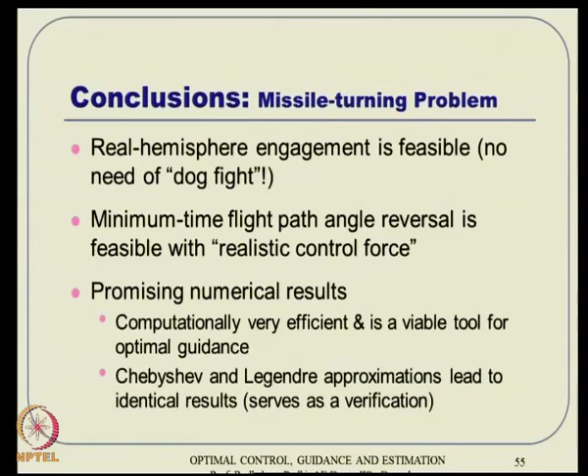As I told before, there are various other things that Michael Ross, I.M. Ross and his group have actually demonstrated. There are other groups also working on the pseudospectral method, but this team has actually demonstrated it in a variety of problems, including hardware implementation and implementation on the International Space Station.

Some of these references you can see for more details, and my recommendation will be probably the first one, which appeared very recently in 2012, with a very good overview of the method itself, from theory to flight. If you read some of these papers, it's written in a way that is not too mathematically involved, whereas other papers can be a little math overwhelming. This one is written very intuitively, relatively long, and summarizes the concept with the necessary mathematics. So my strong recommendation is that you should read this paper and understand more.

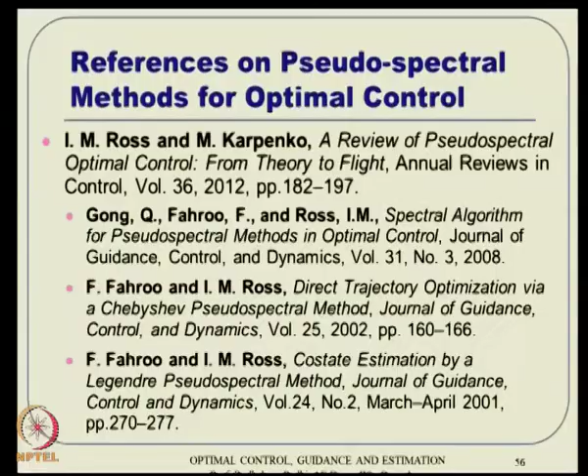Alright, so this is what I wanted to talk about in this particular lecture. Furthermore, on these ideas, what we have developed - calling this MPSP method and MPSC subsequent things - we will discuss in the next lecture. Alright, thanks a lot.